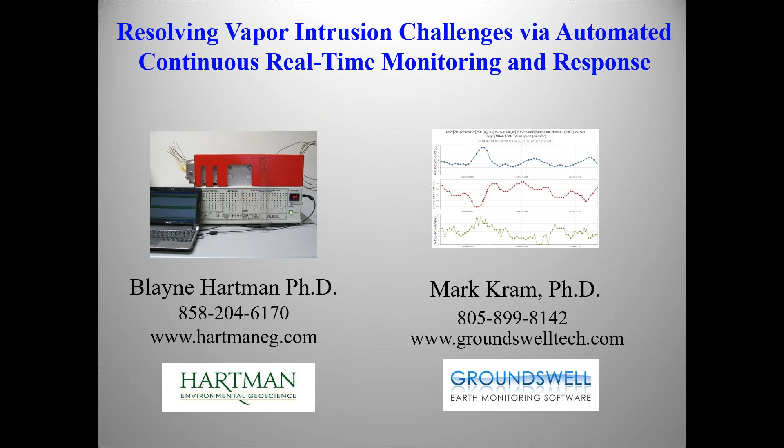All right, so we're going to talk about really two major topics in this presentation. The first one is what's going on in the vapor intrusion world, kind of the hot topics that are being discussed at the vapor intrusion conferences.

By the way, one of which will be in Amherst, I think, next week? This week. This week. Oh, okay. In Amherst, there's a vapor intrusion session. Then AWMA has a session or a conference in December in Phoenix. And then, of course, there's a San Diego conference every March.

So the hot topics being kicked around at these conferences, that's topic number one. And then topic number two, and really the title on the title page, this high resolution automated continuous monitoring. That's what Mark Kram's going to present to you. I'll present topic number one.

First, I want to summarize, because I'm asked this question all the time, why is vapor intrusion such a concern? Well, here's why. Because we're worried about this pathway over very long distances. I like to say it's the nets. We have very wide nets, hundreds of feet laterally and vertically. So in other words, it sucks in a lot of potential receptors if you have a contamination source, whether it be a plume or a point source.

We're worried about lots of compounds. At least the potential list of compounds is very great. Turns out really, in practicality, it's more 10 or less compounds that most of the vapor intrusion sites are concerned with. But there is a long list, 80 plus, and in some cases we worry about many more compounds than just, say, the 5 or 10 that are most common.

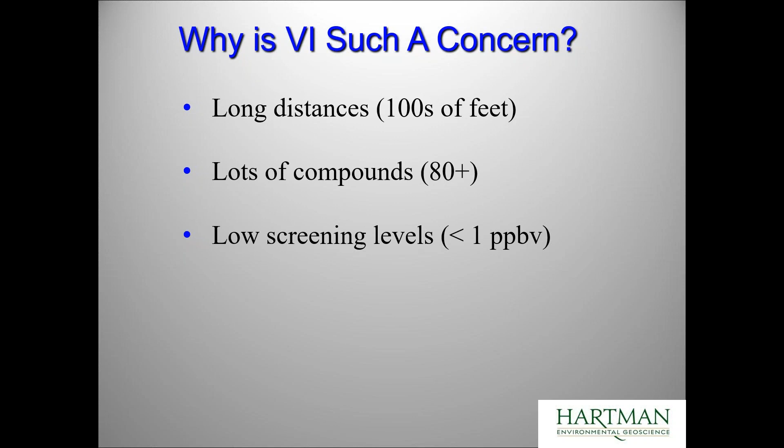The screening levels that we're worried about, in some cases less than a part per billion volume, in some cases less than 0.1 ppbV, so we're worried about parts per trillion. 0.1 ppbV is 100 parts per trillion. We're looking at values that are less than 1 microgram per cubic meter for compounds such as TCE and benzene and some others. So that's also another factor.

And then there's lots of different types of receptors. We worry mostly about people, of course, but I've been on a number of job sites where I was worried about animals. We were worried about the eggs of tortoises, the eggs of gooney birds. And I've even been on job sites where we're worried about fruit, tomatoes and strawberries of all things. Can these VOCs get partitioned into the fruit and then we ingest them?

So when you add up all these four factors, put them in a blender and mix it all up, what it means generally is that vapor intrusion is a concern at the vast majority of sites, and the vapor intrusion pathway can then hold up a real estate transaction or a site closure.

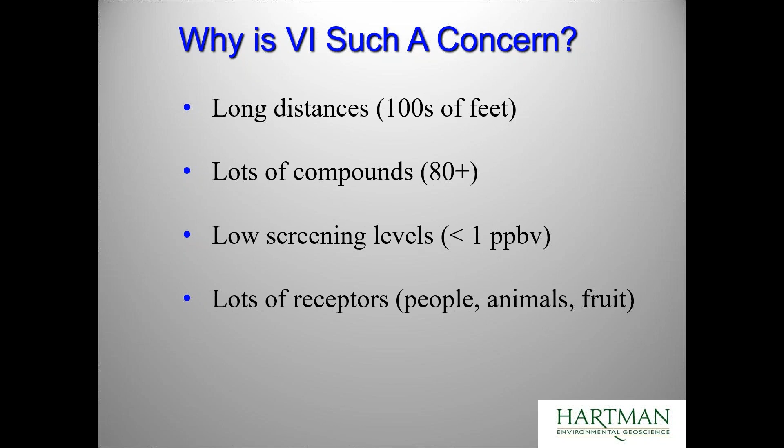All right, so let's talk about these hot topics, okay? Really the title here shouldn't be regulatory topics. It should be more the hot topics being discussed. And the first bullet point says getting cold. And what I mean by that is most of the regulatory issues that we've been concerned with for the last few years, they've been around a few years. Number one, the EPA OSWER and OUST guidances, they came out over 3 years ago now. I think for the most part, people have adjusted to them.

Number two, ASTM came up with an update to the Phase 1 standard. I think that was 2 or 3 years ago now, so we're kind of used to that. And then ITRC came out with their PVI guidance, and that was 2 or 3 years ago now. So really, I consider these topics to be kind of cold. I shouldn't even say getting cold, I should say cold.

Now, there are some states, however, that are working on revamping their guidances. The ones that come to mind are Missouri, they just, in fact, released theirs, the state of Washington, and Illinois. Those are 3 states off the top of my head that have either just released or are about to release new state guidances.

So the topics that are being kicked around at the vapor intrusion conferences are these, what I call red hot. Sewers: are sewers a pathway and should we worry about them? Indicators of VI. Models and attenuation factors, and then, of course, the short-term trichloroethylene exposure. So I'm going to address all 4 of these in this order.

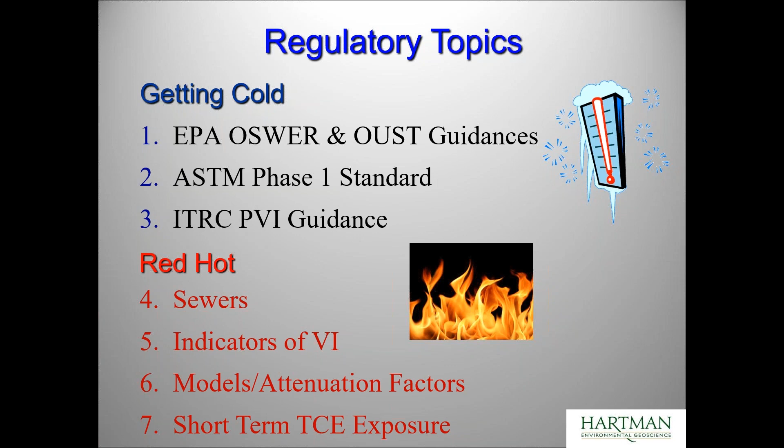Why are we worried about sewers? Well, generally, I look at sewers as just being another indoor air source. It's like potentially having a compound in the room that contains the contaminant you're worried about. That's how I look at it. Now, when are sewers the greatest potential source? Well, it's when the P-traps, which I show here in the bottom diagram, dry out.

These P-traps are designed to be wet, and then the water acts like a vapor barrier, as you can see in this photo. If that dries out, then you have an open conduit from the sewer, which in this case is to the right, to the house, which is going to the left. All right. Now, when might P-traps dry out?

Well, they dry out in my house because I have 2 guest rooms. If I don't have guests for, say, a few months, and I live in San Diego, we're very dry in general, those P-traps will dry out within a couple months. So what we do every couple months, if we've had no guests, we run water into the sinks just to make sure that the P-traps stay wet. That's all you have to do is run water.

I was on a job site in Missouri where this was the case. It was an old jail. When they didn't have many prisoners, which is a good thing, they wouldn't use some of the showers, and the P-traps under the showers would go dry, and then they would have vapors coming in from below. So it's really easy to prevent, in most cases, any sewer gas in the house by just keeping the P-traps wet.

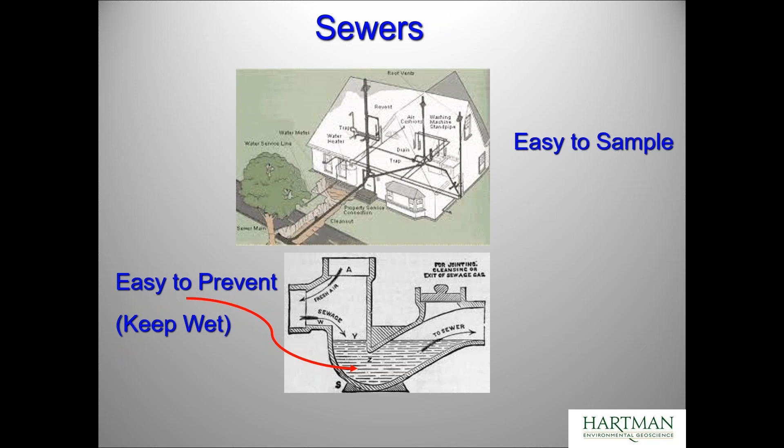But let's say you can't, and you want to sample just to see if the sewer is a potential source. It's very easy to sample sewers. One thing you can do, if you have the health and safety permission, is go up on the roof and run tubing right down into the roof vent. Just pay it out like a fish line and collect a sample in a canister or a syringe. Very easy to do that.

Most structures have cleanouts somewhere between the main out in the street and the structure. If there's a cleanout, it's very easy to open that up, run tubing down the cleanout, collect a sample, and analyze it. The last thing one can do is go under the sink and drill a very tiny hole, like 1/8 inch OD or 1/4 inch OD, stick a little tubing through the hole and collect sewer gas on the sewer side of the P-trap. Then you just plug the hole up with a little bit of epoxy.

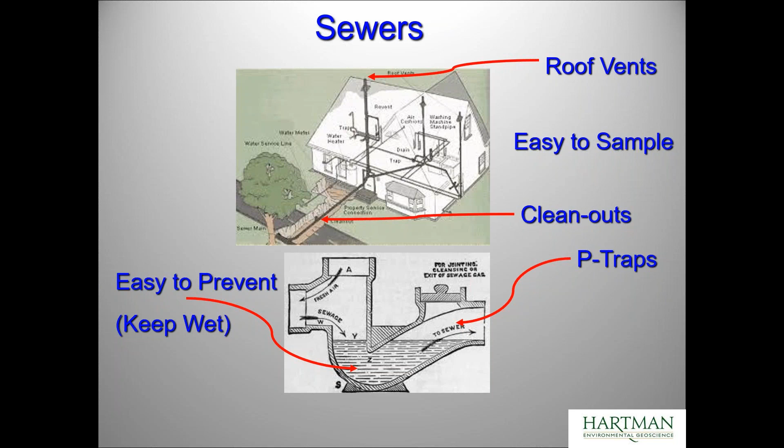So it's very simple to do, and the main point here is that you shouldn't get wigged out about sewers, because it's easy to prevent and easy to sample. Really, the bigger source of contamination from sewers is going to be the laterals that run from the street to the house, with tree roots perhaps breaking through them, or if they're very old, they'll crack. So sewer gas is more likely to be a source to the soil gas than it is to the indoor air.

All right, VI indicators. Can we use some easy to measure variable to predict when vapor intrusion is occurring? Well, what do we mean by that? What about something like wind speed? If the wind speed's high, should we go measure? Or barometric pressure or temperature changes? Now, EPA has really been concerned about this.

The last 2 sessions of the conferences that they held in March in San Diego, 2017, 2018, they had a number of talks relating to this. Mark will show you some data after I'm done showing some of the correlations we are seeing with some of these parameters. As we do more and more sites, we'll have a better feel for whether there is a VI indicator.

But the question I always pose to people is, do I really want to go out and only sample when VI is at its maximum level? Aren't we supposed to really, for these risk assessments, be worried about nominal conditions? Why would you want to go out, and what service are you doing to your client if you're only sampling during a worst case when VI is turned on? So that's something you need to think about.

Modeling. In most states, modeling is getting the boot. And so what the EPA wants, and what the states are leaning towards is, instead of allowing people to model their way out, instead to use the Vapor Intrusion Screening Level Calculator. That's the VISL, Vapor Intrusion Screening Level Calculator, okay? And that's probably what many of you are seeing from some of the states you're working with.

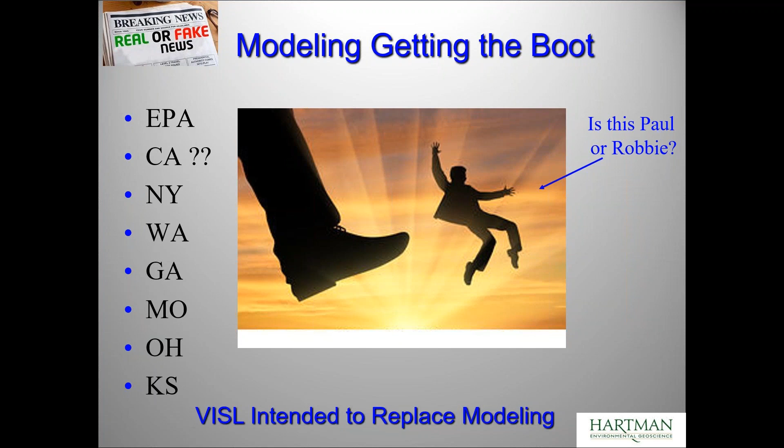All right, now to further complicate things, EPA, after this push to go to the VISL, they pulled down the JE spreadsheets, the old spreadsheets, off of their website. Well, lo and behold, back in September 2017, about a year ago now, all of a sudden, they post new versions of the JE model. So I jokingly said, well, this is the return of the JE model. They released it again. They posted it on their website. I didn't check before today to see if it's still there, these new versions. My guess is it still is.

If you go to that model and you download it and go to the README page, which is where you're supposed to start, it says, quote, the JE model does not replace the EPA VISLs. Initial site screening, please use the VISL, which of course is very, very conservative. It doesn't make clear then that if you indeed fail the VISL, in other words, you have a potential vapor intrusion problem, can you then go and use this model? It's not made very clear.

Just for grins, I went and did a quick model run to compare it to the VISL. Trichloroethylene, subslab soil gas, 1 in a million risk, and you can see for residential receptor, 82 if you use the model, 16 for the VISL, 5 times less restrictive, and for commercial, 350 versus 100, 3.5 times.

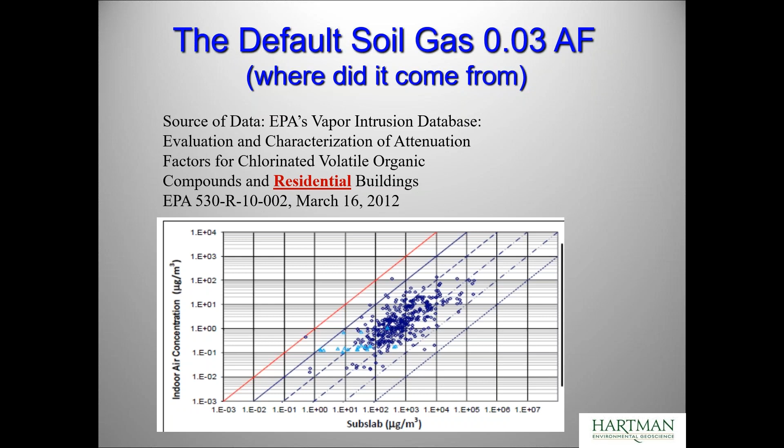And what we have is a plot of indoor air versus subslab from residential structures. And you can see that there's a lot of scatter in this correlation, and that's the key to keep in mind. A lot of scatter. If one did a regression analysis on this, it would not have a very high regression coefficient. So keep that in mind. But this is where it came from, the 0.03. The 0.03 is the 95th percentile of that data set. All right, so it raises the question then, should we be using 0.03?

So there again, there's that title. I just repeated it for you in bigger text. Once again, residential in red. And here's the conclusions from this report, this is EPA's report, taken right out of the conclusion section. The attenuation factor recommended for residences with basements, 95th percentile, 0.03. There's the 0.03. But with slab-on-grade structures, it's 0.01.

So why are we using 0.03 for all structures? Should be using 0.01, seems to me, based on that report. So why has everyone jumped to 0.03? The other thing is, now I'm going to show you, remember this is residential in red.

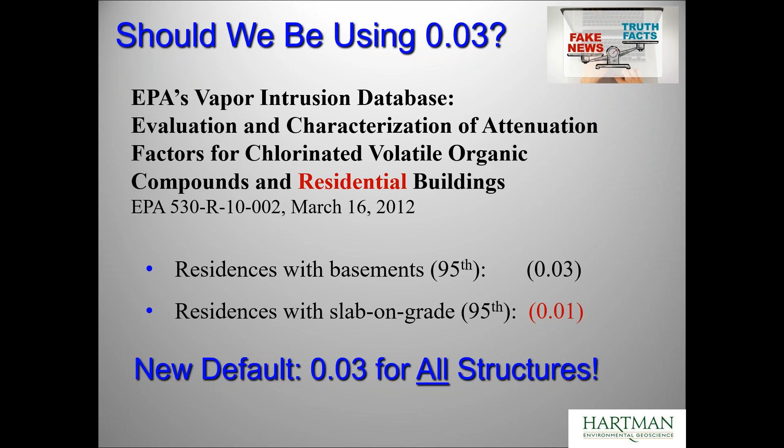So now what I'm going to show you is that same plot of indoor air versus subslab for commercial structures. And there it is. No, there's not an error there. There's the database. There are no data. There is no database for commercial structures. And so EPA is saying, and the states are saying, well, use the 0.03 since we don't know what else to use. There's absolutely no data to support the use of 0.03.

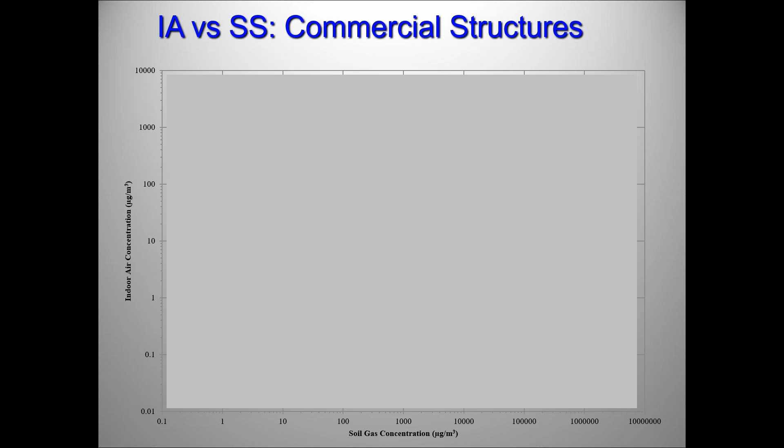What do I do when I'm doing commercial structures? I measure radon underneath the structure and inside the structure to determine a structure-specific or slab-specific attenuation factor, because using 0.03 has no technical basis at all. All right, so that's the models and attenuation factor issue.

Back to the hottest topic, next to PFAS, that is, short-term trichloroethylene exposure. I'm going to assume all of you listening have some idea what it is, but to say it very quickly, we're worried about the malformation of hearts in pregnant women during the first, I think it's the first trimester of pregnancy, so hence the pregnant woman, hence the bandaged heart.

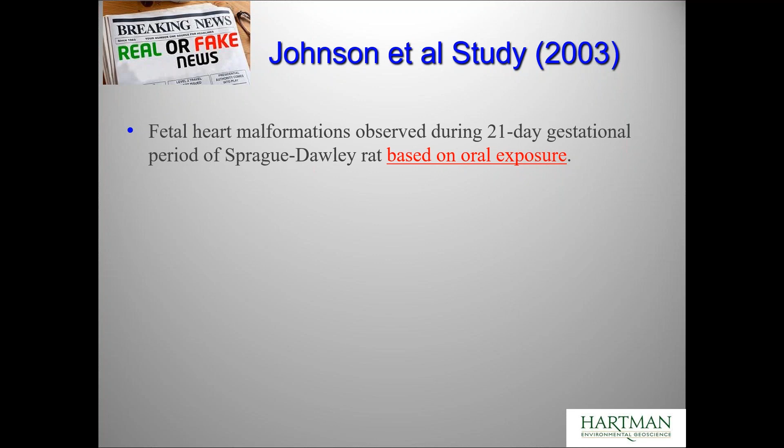Now, all of this concern was raised by a study done by Paula Johnson, not Paul Johnson, in 2003. Now, they observed these fetal heart malformations in the first trimester of a rat, but it was based on oral exposure, not inhalation. They fed the rats basically water that had been spiked with TCE. So that raises one question, is the partitioning of TCE into the human body going to be the same if you drink it versus if you breathe it?

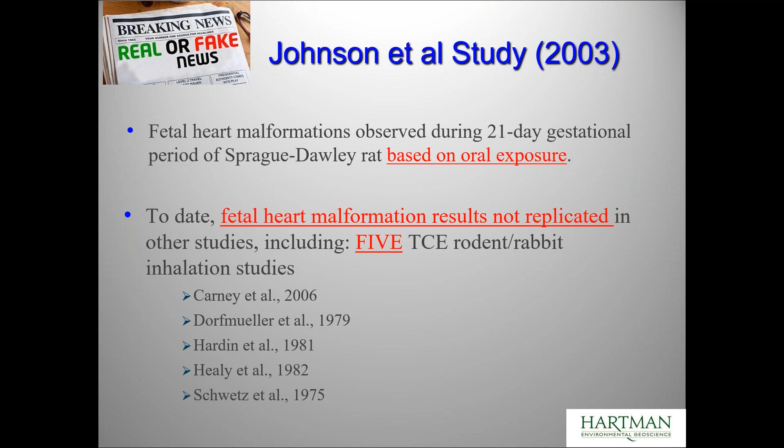And this study has been done previously, previous to Johnson et al., and then after Johnson et al. There's 5 other rodent-rabbit inhalation studies, and there wasn't any fetal heart malformation in any of them. So the Johnson et al. study seems to stand out against the other 5 studies, including one that was done after her study. Well, the solvent industry said, you know what? There's a lot of other errors, by the way, and potential errors in that Johnson study.

So the solvent industry said, let's try to reproduce Johnson's study. And they've tried this now 2 or 3 times. The most recent trial or study was actually successful. It concluded 2 months ago, August 2018. That's a mistake for those who are looking at this slide. August 2018, it was concluded.

The evaluation of the data is currently in progress, and we expect to hear the results by the end of 2018. Be very interesting, everybody, if this study shows no fetal heart malformation. Be very interesting to see what happens and what EPA does. Stay tuned for this one. Could get very interesting.

Meanwhile, while we're waiting for the results of that study and, of course, the debate that will continue from it, we've had different regions come out with different standards. In fact, most of them have. I grabbed the Region 7 standard because it was kind of one of the more recent ones a couple of years ago, and it was one that was a little bit specific in terms of how they are viewing the short-term TCE issue. This is their text and quote.

It is assumed an exposure to TCE at any time during. Now, I'm the one that turned that text to red with the underline. At any time during. So they're not saying that you need to be exposed for the full trimester, 21 days. They're saying at any time.

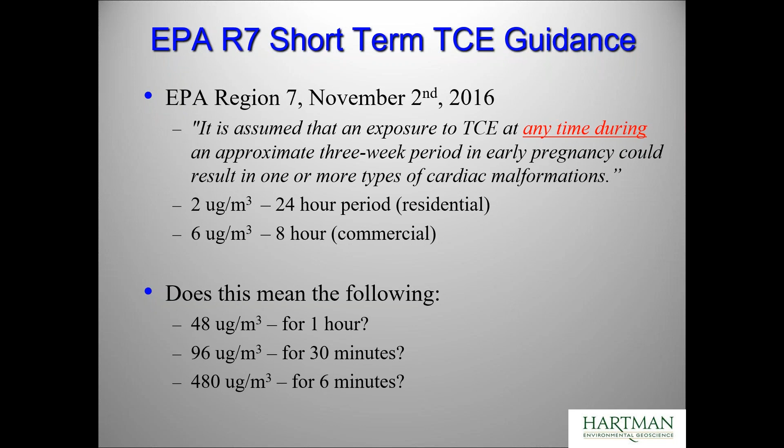And when I asked this question to toxicologists, does this carry through like this? Essentially, is it linear? I don't get a consistent answer from the toxicologists I talked to.

All right, well, with all this going on, many states have been reopening TCE sites. So here's just a partial list of the ones I know of. If you're a state regulator and you know you've reopened sites or are going to, please let me know so I can add to this list. So they're jumping on the bandwagon, so to speak. And what does this all mean? Well, we don't have audio, so you probably won't hear this, but it means money. All right. So that's kind of the summary of the hot topics.

So now what I want to say to you before I pass the baton to Mark is I've been doing vapor intrusion assessments since the mid-90s, so over 20 years now. And in my mind, the fundamental problem with vapor intrusion assessments and trying to figure out vapor intrusion remedies is not enough data. So when you use canisters or passive collectors, these types of things, here's what you get. You get a data point averaged over some period of time, 8 hours, 24 hours, 21 days, something like that, right? So let's say that there's our screening level and this data point is just above the screening level.

So what do you do? Well, it's just above. You're going to go back and do it again. In fact, most agencies now want a second sampling even if you were below the screening level. So 6 months later, you go back and what do you get? Oops, now we're below. Now what do you do? Well, most likely, you're going to be going back a third time to see if it's above or below. And now you go back and you get this. And now what do you do? And so maybe 6 to 12 months have passed and you're still in a quandary as to what to do.

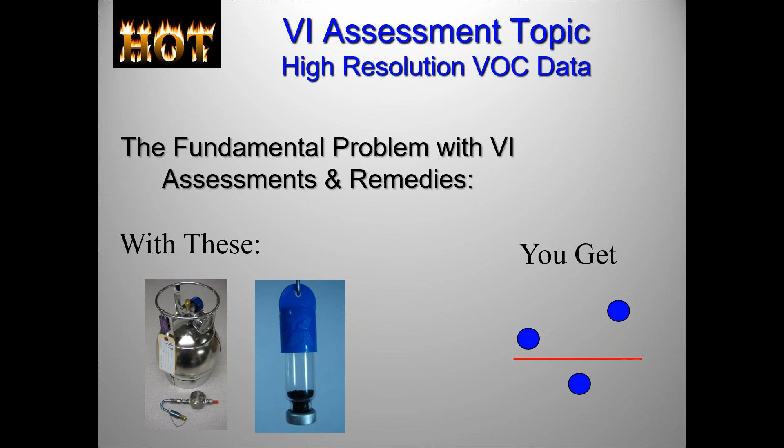Excellent. So I'll talk a bit about the technology. I'll present some data from a couple of these sites that were specifically selected to articulate a couple of lessons that we've been learning, and then we'll open it up to questions. So here is one of the configurations that we've been using. Many of you will recognize this laboratory grade instrument, a gas chromatograph that we've customized in a way that allows us to monitor multiple locations over time in a continuous monitoring mode.

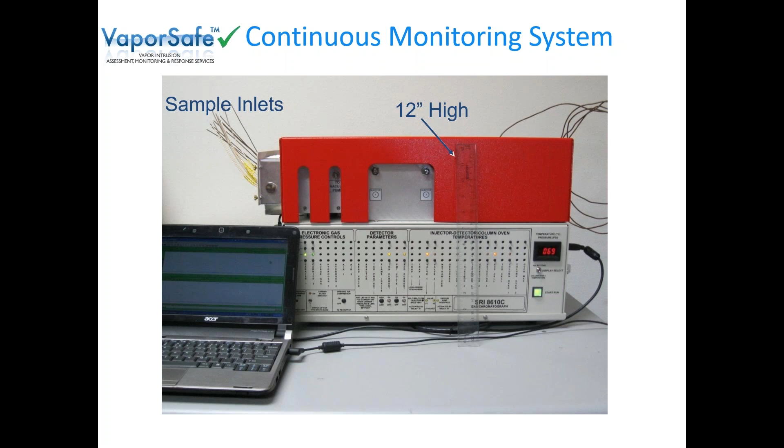It has a PC connected to it so that we can have data flowing both forward and backwards, if you will. So remotely we can actually control the instrument, but as soon as we determine a concentration, it gets sent to the cloud where it's automatically processed and made available. The system is fully quantitative. It's not screening level. It's actually a laboratory grade instrument, and it's very sensitive. Additional modifications have been applied to allow us to meet these ultra low levels for a lot of volatile organic constituents, trichloroethylene, tetra, and even vinyl chloride and others.

Very quick analytical time. Each routine takes a little bit less than 10 minutes. So if you have 6 sample locations, every hour it will come back to that first location. And we can monitor multiple locations, typically up to 16, but we can also modify it to go up to 30 locations at a site. It's essentially a modified EPA method TO-14A. We've had this out for up to 11 months without requiring recalibration.

And we can remotely control it, so we can not only change the routine and change the locations remotely, but we can also have other types of things that we can engage along the way. The data is uploaded in real time, and we have alerting and even controlling components to it. And perhaps one of the most powerful capabilities is the fact that we can switch from continuous monitoring mode to discrete mode. And this is key for answering questions.

So for instance, you get a big hit somewhere in the facility, you can go and explore that with a syringe, and then 10 minutes later, you can answer the question, did somebody bring something in, or is that really a VI intrusion location? We've been using continuous monitoring for confirming, mitigation, optimizing, and also for protecting occupants. We have been experiencing situations where dynamics were observed with HVAC modification, fans, air filtration.

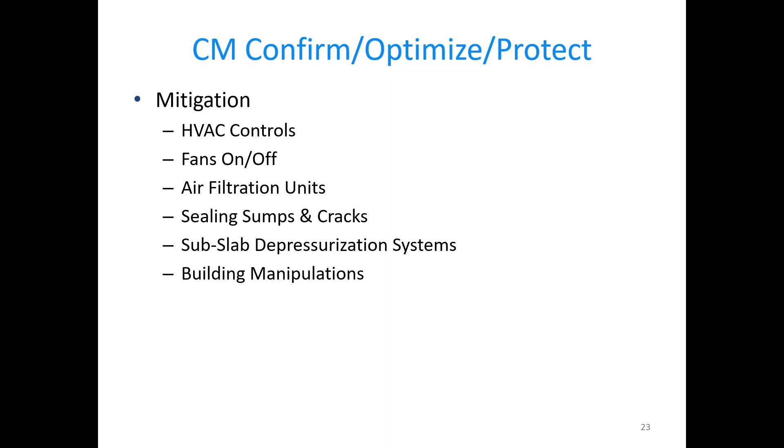We've come in after people have sealed cracks and sumps. We've helped people optimize SSD systems, and then I'll talk about a couple other building manipulations that are very simple but give us a lot of insight regarding where issues might occur.

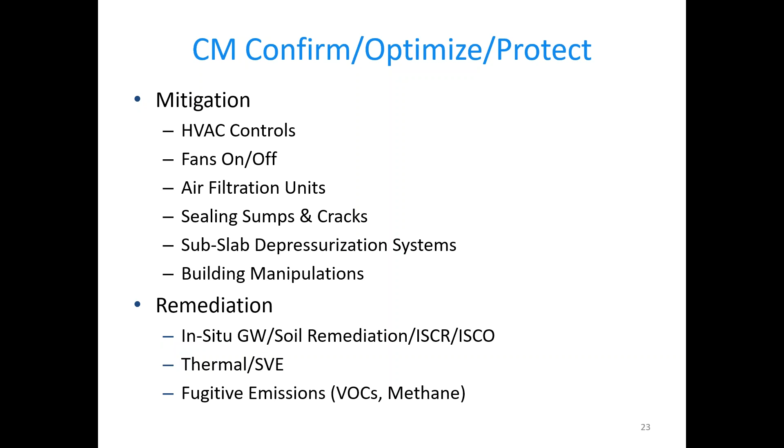On the remediation side, we've been working on several sites, mostly thermal, but we're also starting to get into areas where, for instance, methane buildup with in situ chemical reduction has occurred. And we can control those emissions quickly because we can detect when breakthrough occurs, and then the field personnel can actually respond to that without having to wait for a laboratory result.

In terms of deployment, it's fairly straightforward. You just need a table. I'll show you some pictures of this. We can put it in a trailer, we could put it in a room. We have sample lines that can run up to 300 meters from the instrument.

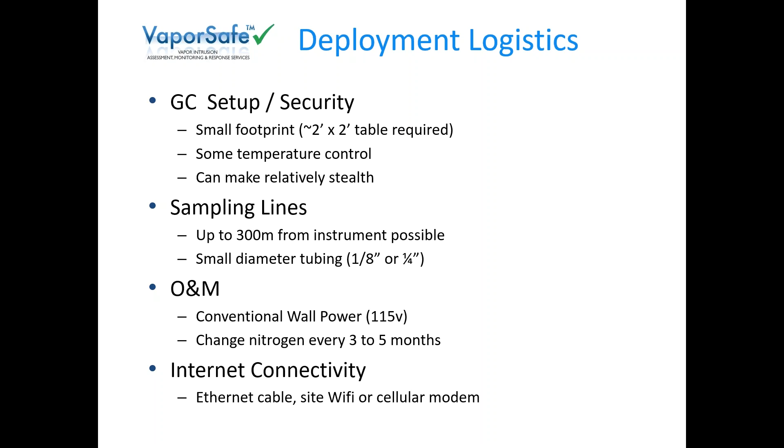In terms of O&M, very simple. We just need to have access to power, and every several months or so, if you go for long durations, we can change out the carrier gas. We do need internet connectivity, so if the facility doesn't include that, we can bring a pack to set up a system right there.

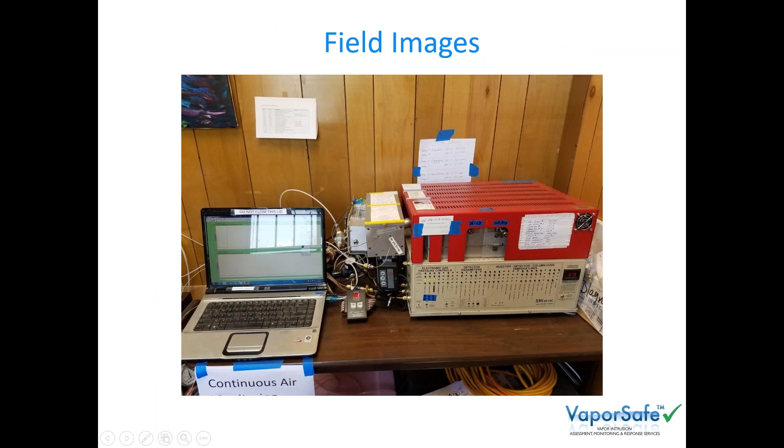Here's one image of one of the deployments. This was in a trailer, so you can see where the system is connected to a valve controller, and that runs to the lines that will run to the monitoring locations. Here is an image where people are deploying some of the sampling lines. So the gentleman will run that to the area that we want to monitor, and he'll run the other end of that tube back to the instrument itself.

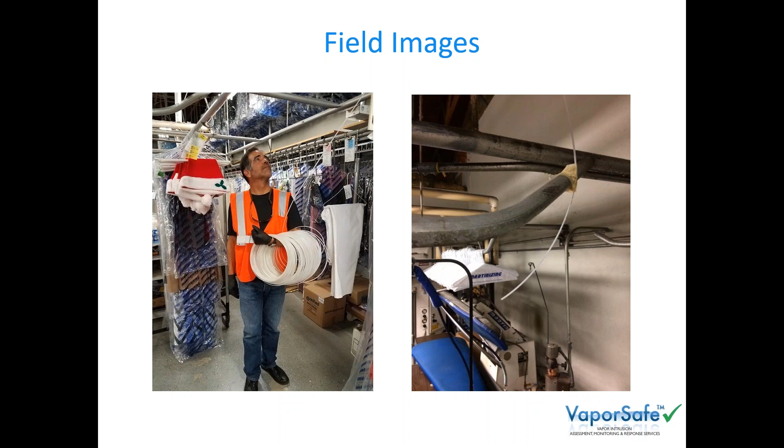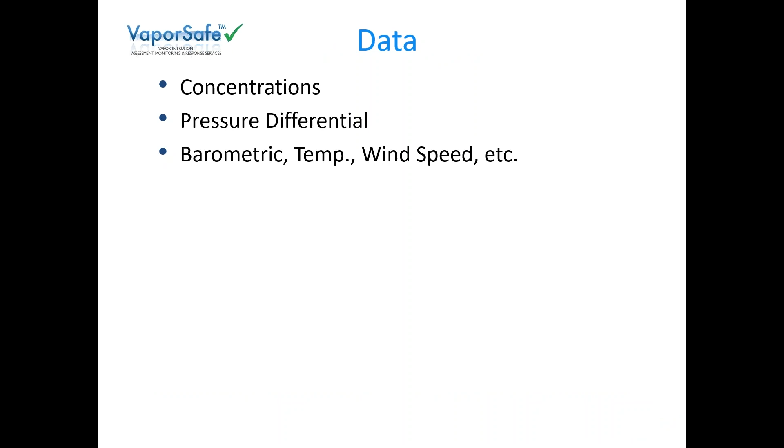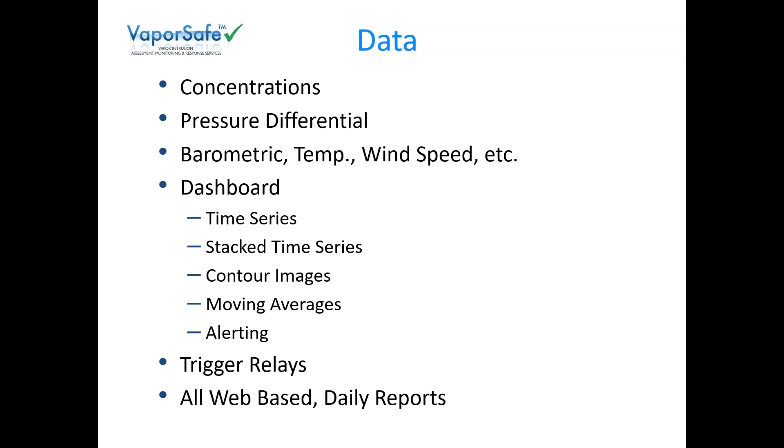In terms of data, we'll track concentrations, pressure differential, climatic data, and then it'll be presented in an intuitive manner. We can look at time series, stacked series, contour images, moving averages, and then we can not only trigger alerts, but also document when and where those exceedances have occurred. And then if you'd like, we can also trigger relays and turn on blowers, things like that. It's all web-based, so you don't have to download any software. We'll just give you a password, and you can sign up for reports as well.

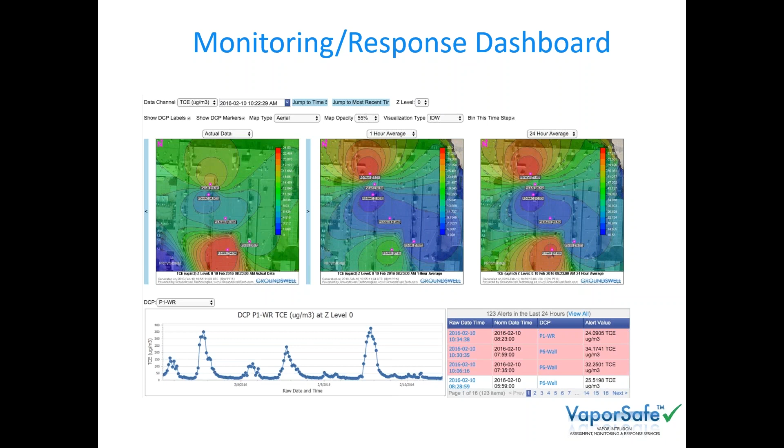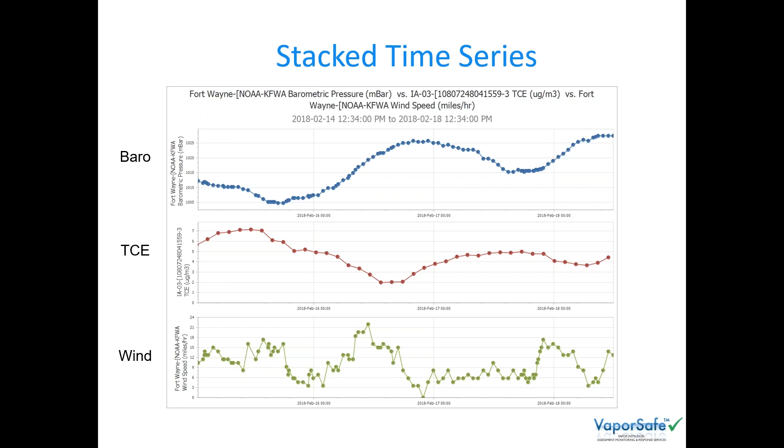Stacked time series is extremely helpful. It's really helping us articulate cause and effect. In this example, you see barometric pressure on the top, TCE in the middle, and wind speed. So this gets into some of those indicators that the EPA has been very excited about. Again, we can set up rules for thresholds for triggering an alert to the key personnel, or even turning on blowers. Okay, let's get into some data.

So we were trying to explain the power of this to a regulator on the East Coast, and they said, okay, you guys think you're hot stuff. Why don't you come out here, because we have a Freon issue in this building that we've been monitoring. And they had passive time-integrated data leading up to this, and they couldn't figure out why they were seeing Freon in these samples.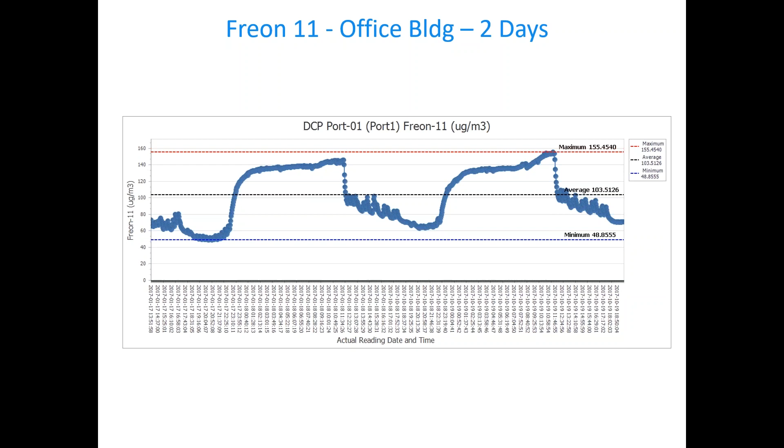Here's another beautiful example. This was a federal building where they had been scratching their head about where vapors might be intruding into this building. So Blayne was walking around and taking samples in a discrete mode, came across a room that had a drain in it and started getting hits of concern for trichloroethylene.

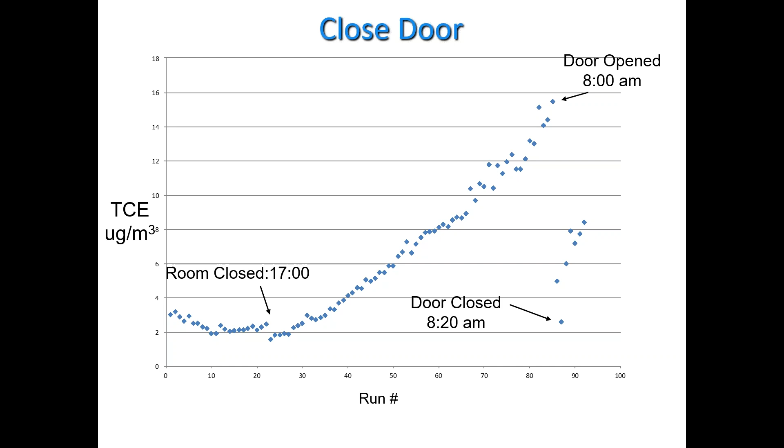When the consultant returned the next morning and opened that door, you saw an immediate drop in concentration. And then once they closed the door again, you saw it start to rise again. Well, this confirmed to us that that was a point where vapors were coming into the subsurface or into the building. That pattern was a key.

Imagine what kind of data you would have gotten with a passive time integrated sampler. You might not have been able to figure it out. In fact, before we were out there, those types of samples were collected. But the beauty of this is that we can find those VOC entry points right away. That pattern that we saw is related to the mass flux.

So for those of you that are excited about evaluating those types of considerations, this data would be very helpful for that. But also, it was very simple building manipulation that helped us answer that question. Closing the door, that was easy. And they know exactly what to do, the next step: seal that drain and start extracting.

Here's a similar situation at another facility on the East Coast where the spatial pattern was revealing right away that we had some kind of issue in a basement where there were 2 sumps. So after watching it for a while, the consultant got a very smart idea. He said, let's cover these sumps and see what happens. So he went to the hardware store and got very low cost materials.

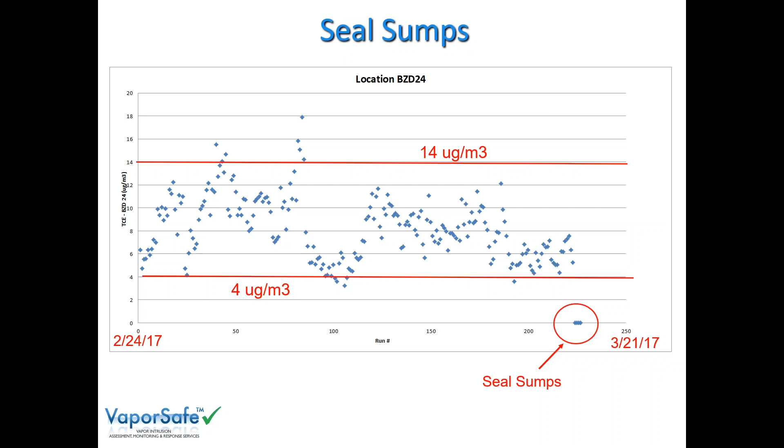And sure enough, as soon as those were covered, we saw an immediate drop in concentration. So they confirmed that that was where materials were coming into the building. Once again, that pattern was key. We saw a temporal variation and we saw a pattern, but we were able to instantly, with just an easy building manipulation, confirm that those sumps were the culprit, if you will.

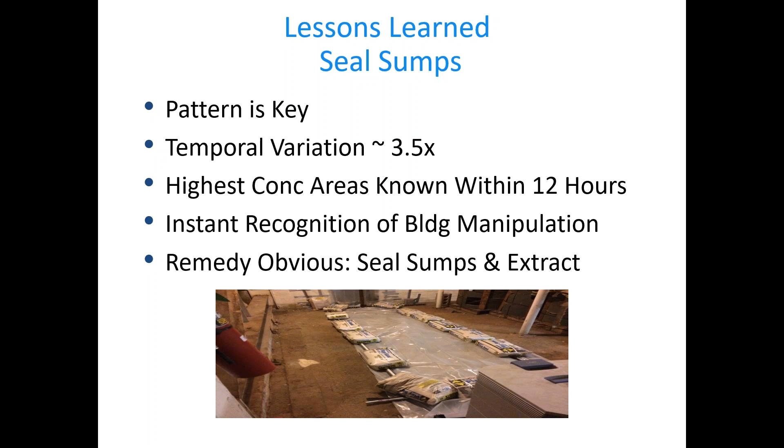And you can see an image below there. All they did was cover it with Visqueen and some pipe and some sandbags, and then we immediately saw, without having to wait for a lab result, a response. So to pause for a second, we're seeing these patterns right away, within days typically, sometimes even quicker. But we can quickly determine if it's from vapor intrusion or if there's an indoor source. And therefore, we can determine the cause and effect.

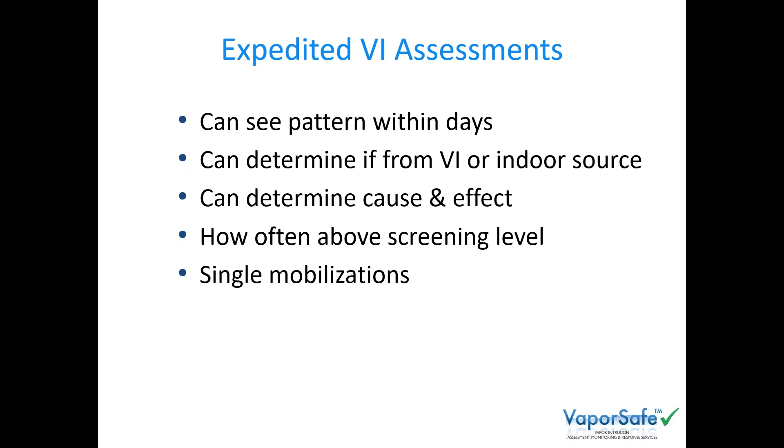We can also do time integrated averages and figure out how often you're above the screening level, or whether you've exceeded certain thresholds for toxicological purposes. And probably most importantly, we're resolving these questions with a single mobilization. Again, that pattern is that opportunity.

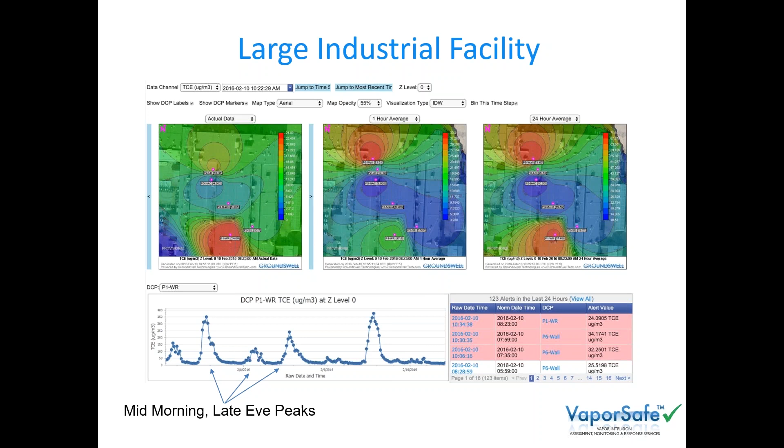Okay, here's another fascinating lesson that we learned. We were in San Diego at a large federal facility, and you can see in the lower left-hand corner, there's a time series chart. And we had some very large hits in the hundreds of micrograms per cubic meter for TCE. And they were occurring consistently at around the same time every day. Now, I lived in San Diego for a while, and I remember that in the midday the sea breeze starts, and that's because of pressure changes.

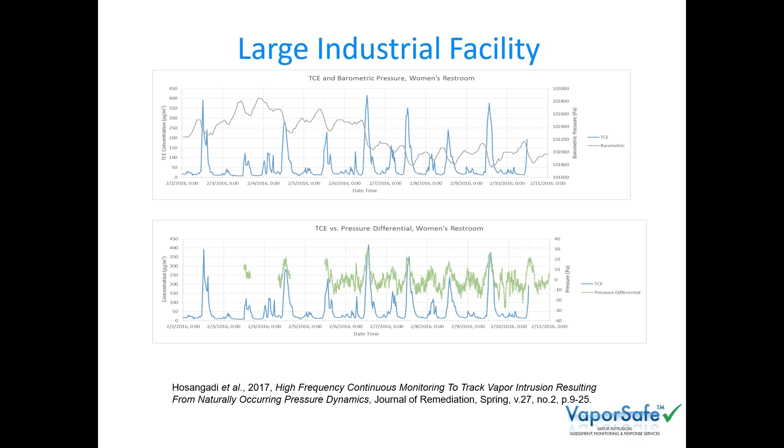And so the consultant was very clever, deployed some pressure differential sensors, and you can see along the second chart there below that every time you had a positive pressure differential, meaning that the subsurface was at a higher pressure than indoors, the Earth basically exhaled. And that coincided with this pressure drop at the surface. And this is a beautiful pattern that we're starting to see at many different facilities.

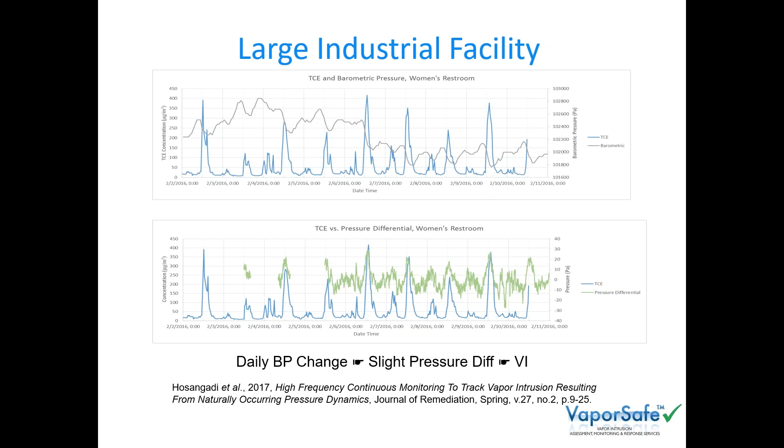But the beauty of this is it's saying that we can solve this now because we understand what's causing this. This daily fluctuation, this diurnal change, basically results in a slight pressure differential. It doesn't even have to be that large, and that's what's causing the vapors to flow in. We have a reference there, a citation, if anybody's interested in that paper.

So again, that pattern helped us observe large variations, and we saw that there were pulses of these peaks, if you will. Those highs correlated with these pressure dynamics, and the correlation between differential pressure and concentration was evident. A lot of the state guidance that I've read suggests that when you collect a sample, you document what the barometric pressure is at that time.

I submit to you that while that could be helpful, it's not as useful as the pressure trend, because if it's increasing, you'll probably underestimate the worst case. If it's decreasing, you'll probably hit that peak. But bottom line is that the pressure differential will help you a lot in that regard. We confirmed that that vapor extraction system was working as well.

So after observing that, Cliff decided to build a couple of systems that would integrate really well with our platform so that we can use it in a stacked time series configuration. So we've got a wireless system now that we deploy. In some cases, we've used up to 10 of these at an individual facility. But it'll send it to our base station, and we can couple it with chemical data. We can also use this as criteria for engaging controls.

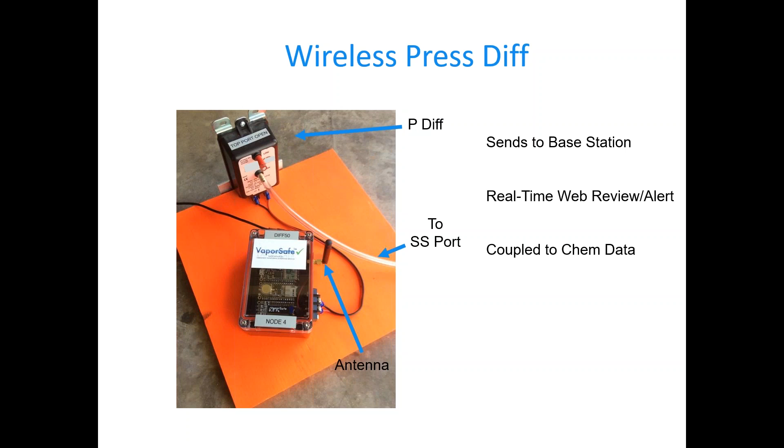This is from a thermal remediation site, a Superfund site located in the San Francisco Bay Area. And we're tracking from 13 locations, and one of them was a warehouse. And as soon as that system was energized, we started to see an increase in trichloroethylene in that warehouse. Also, on the effluent side for the treatment, we were able to see breakthrough of vinyl chloride. But we were able to immediately respond because we were able to detect that without having to wait for a laboratory result.

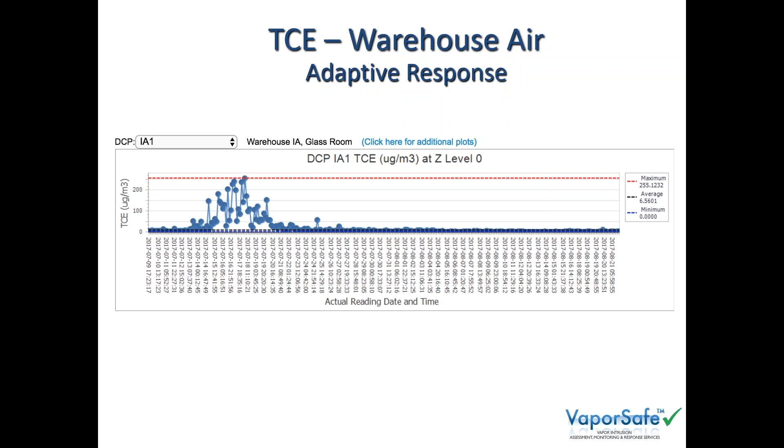So that adaptive response ended up allowing the folks in the field to make modifications on the fly and watch the results. And so you can see that we saw the concentrations in that warehouse drop off to safe levels. So we learned a lot of lessons with that project. This was actually the first time vinyl chloride was ever monitored continuously. But we got instant recognition of breakthrough. So folks were able to adjust and optimize the system.

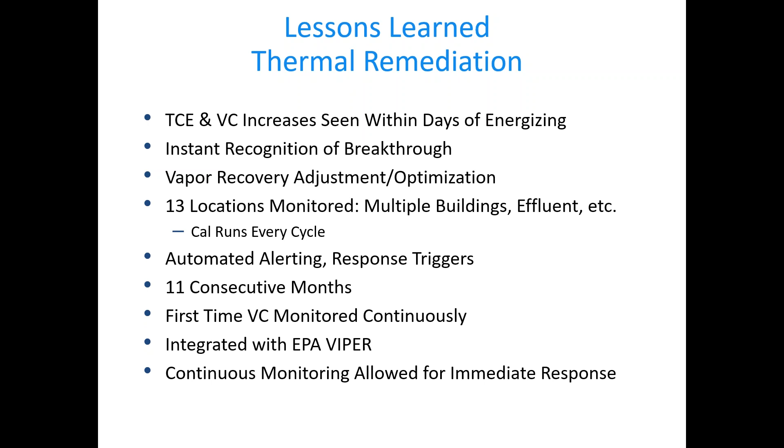We were actually running calibration runs every cycle, and we were triggering these alerts and getting folks out there that were in the know. We monitored for 11 consecutive months. This was so far the longest that we've monitored for. We integrated it with EPA Viper. It was a Superfund site, so now that capability exists. But the key is that continuous monitoring allowed the folks to immediately respond and prevent exposures and liabilities without having to wait for a laboratory result.

Okay, I've got a couple other quick examples here. This one I love. This was a furniture manufacturing facility. And again, it was a mystery site. We've been called in to help with a lot of these mysteries, if you will, where some data was collected, but they really didn't understand all the nuances. This building was for sale, and the owner had an offer from somebody that was lowballing them by about $2 million less than the asking price. The reason being is because previous investigations suggested that there was a vapor intrusion issue. They had subsurface TCE and PCE.

So we started monitoring in the late afternoon, early evening, and we didn't see much. And then sure enough, as soon as people started to work, we saw these peaks, and it would drop off later in the day when people stopped working. We were only seeing the TCE increase during working hours, and these are high hits, over 200 micrograms per cubic meter. The pattern was all throughout the facility, so it had to be something that was going on indoors. So Blayne and the consultant were walking through the facility, and they saw people using this silicone spray to lubricate some of the machines.

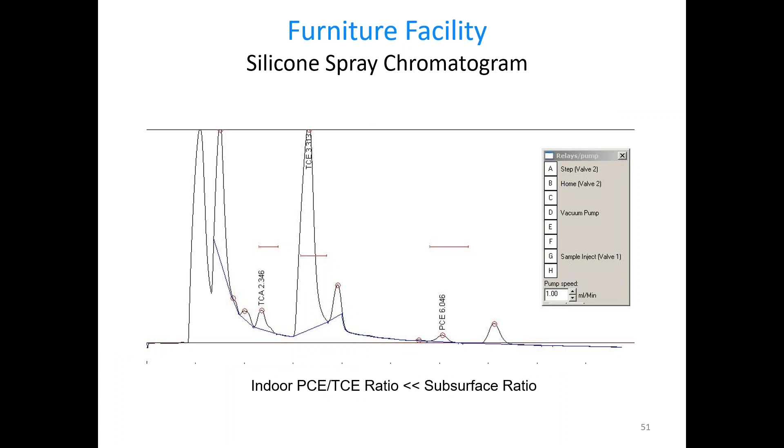Now, if you look at the back of these on the labels, TCE was not mentioned at all. But Blayne got a great idea. He said, you know, I've got the GC right here. Let's evaluate some of these materials. And sure enough, we look at the chromatogram of the silicone spray, and we get a significant TCE hit. So that was wonderful. They got rid of that, and we saw the concentrations drop off immediately.

Again, what did we learn? We were able to help the consultant conclude, and the regulator, that there was no vapor intrusion using multiple lines of evidence. We resolved these mysteries. And this was very quick, within a couple of days, that we were able to accurately source that indoor source, if you will. We protected the occupants. That was obviously very important. And of importance to the owner, he was able to get full asking price after that. So we saved him $2 million with just about 3 or 4 field days of effort.

Okay, here's my last example. And this is a recent dry cleaner that we worked at. In this case, the stacked time series were used to convey a very important message here. So we have 5 different monitoring locations in the dry cleaning facility, and the consultant was very, very clever. What they did was they annotated this to show that the maximum concentrations were only occurring when the building was not occupied. During business hours, when the building was occupied, concentrations were always at safe levels.

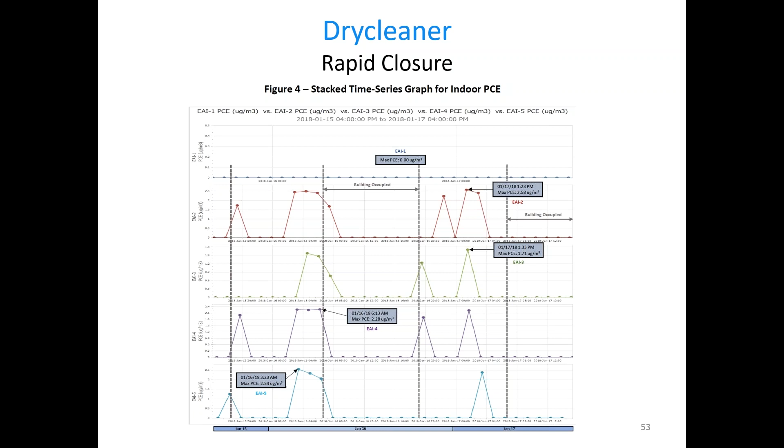And that was primarily because when the business operates, the front door is open and there's a back door that's open as well. So there's a breeze flowing through the facility. And here's another way that they've actually shown that. So they took the data and generated 8-hour time-weighted averages for both the worst case as well as the worst case during an actual work shift, if you will.

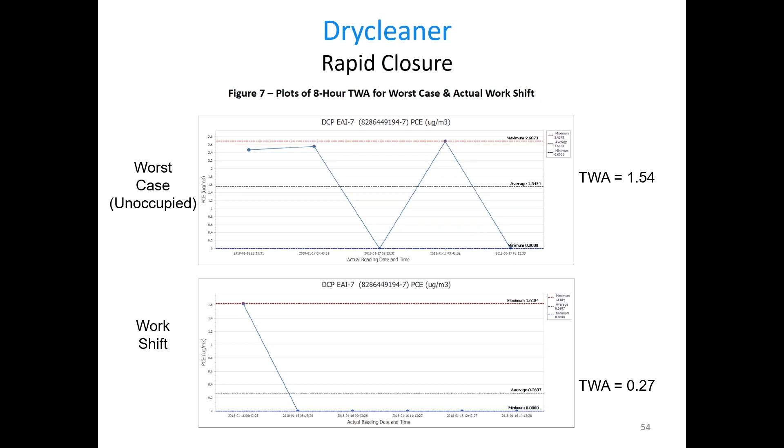So in the top chart, you see during the evening, after business hours and in the early morning, this is when you got the worst case, and the system generated a time-weighted average of 1.54. The highest hit was at about 2.6 or so. But during the working shift, the only hit that they got was in the early morning, right as they were opening up, and then the rest of the day, it was very low, and the time-weighted average for 8 hours was 0.27.

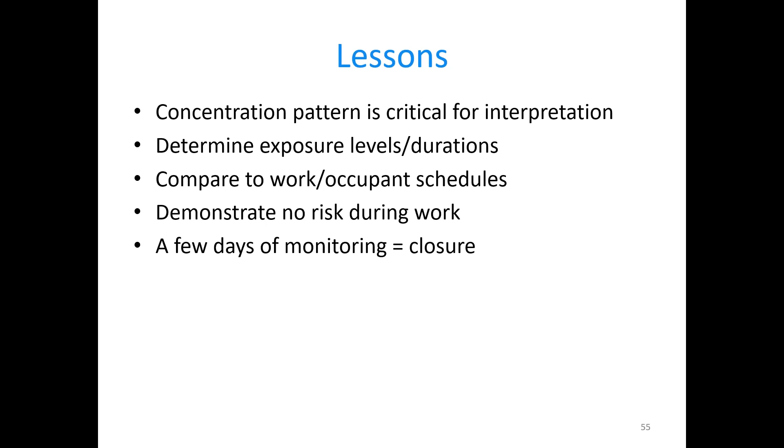So we learned a lot. The concentration pattern is essential for this type of interpretation. We determine not only the exposure levels, but also those durations, and we could compare the work and occupancy schedules. We were able to demonstrate no risk during the work, and they're getting closure of that site right now. They've been notified by the regulator that they're satisfied with this effort.

Okay, so I'll wrap this up really quickly. So we're not the only continuous monitoring tool out there, but we've been learning a lot with our system, and I highly recommend that people consider this to try to resolve some of these concerns. We can play a role in many different phases of the investigation and mitigation and remediation, et cetera. But we can monitor, respond, and confirm. We're seeing a lot of analytes of concern, including methane as well as these other VOCs of concern. And I keep hammering this home, the pattern is that opportunity. It's the opportunity to move from this endless do loop of monitoring and repeating to the next phase, so you know what to do next.

We can rapidly address the following in a single mobilization. We can quickly determine that there's no risk. If there is an exceedance, we can identify whether or not that is an indoor source, or if it's really VI, we can identify where it's coming through the slab and these preferential pathways. We can evaluate and optimize mitigation and remediation systems, and we can do these types of things very quickly during escrow. So for real property transactions and brownfield concerns, we can help meet those very effectively within a couple of days of field effort. And perhaps most importantly, until things change on the regulatory realm with TCE, provided they do change, at least for now, we can prevent those acute TCE exposures.

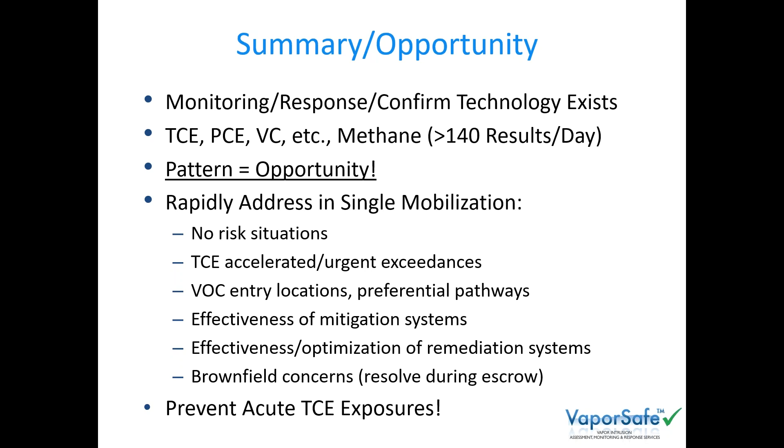So there are a couple quick questions I'll kick this off with, and then I'll open it up, or Rick can open it up. What does it cost? Typically, it's about $1,000 to $2,000 per day. The rate depends on the duration. It's lower cost for longer duration. So it's about $10 to $15 per analysis. You get about 140 per day plus. If you consider that you're going to go to 10 locations that you want to monitor and 10 canisters, we're looking at about $5K already, right? But it can be higher with reporting depending on the complexity. But consider the value.

You're going to the next step. You're not going to have to go back there and repeat it typically. What do the agencies think about this? We've worked with many of the EPA regions, with many of the states, and we've got several upcoming projects where we're going to add to this list. We've worked with Department of Defense. We're going to soon be working with the Army Corps, and we've been starting to work on an international scale as well.

How do these results compare to the TO-15 that we're all used to? We've yet to receive a complaint. So a lot of these projects, since we're still relatively new, even though we've been doing this for about 3 years, folks want to be sure and then collect a SUMMA canister. But to date, we haven't had any complaints.